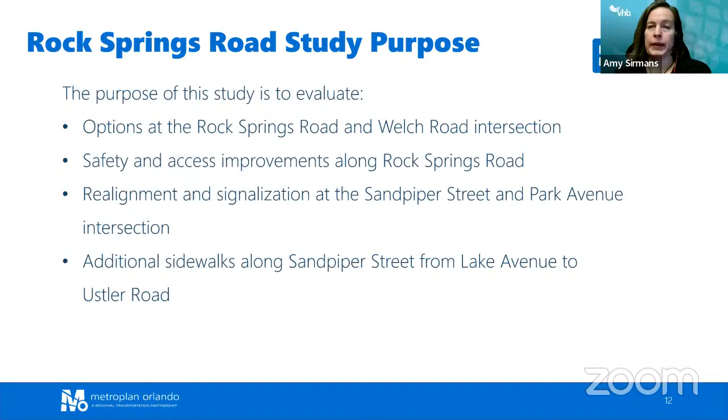The following options are considerations to improve operations and safety as part of the Rock Springs Road study: additional turn lanes and traffic control separators at the intersection of Welch Road and Rock Springs Road, and a new signal at the Publix North entrance near the McDonald's and Bubbalou's restaurants.

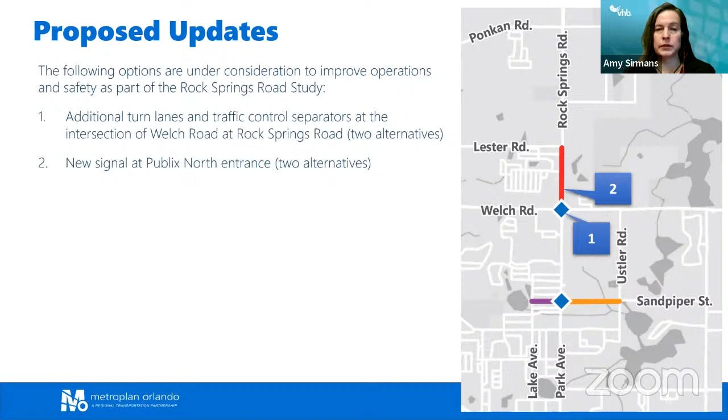A new mid-block crossing south of Tanglewood Drive. Minor intersection improvements at the Lester Road and Rock Springs Road intersection.

Realignment and new signal at the Sandpiper Street and Park Avenue intersection. New sidewalk along the north side of Sandpiper Street from Lake Avenue to Park Avenue, and new sidewalk along the south side of Sandpiper Street from Park Avenue to Ustler Road.

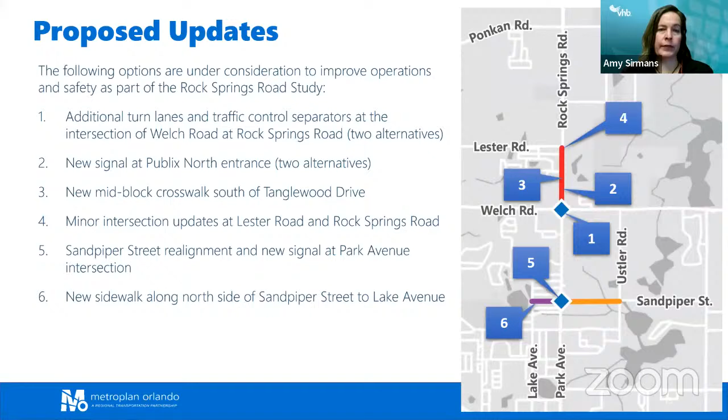We looked at 2 alternatives for Rock Springs Road. For alternative 1, I also want to point out that we understand the importance of these improvements - there was a fatal accident on the corridor today, so that brings out even further the importance of looking at this intersection.

For alternative 1, the east leg of the intersection features a single left turn lane, 2 through lanes, dual right turn lanes, and a raised traffic separator. The west leg of the intersection consists of single left and right turn lanes, 2 through lanes, and a raised traffic separator.

The north leg of the intersection consists of dual left turn lanes, a dedicated right turn lane, and a traffic separator to restrict left turns in and out of the Publix South entrance. Lastly, the south leg of the intersection proposes a single left turn lane, a dedicated right turn lane, 2 through lanes, and a raised traffic separator.

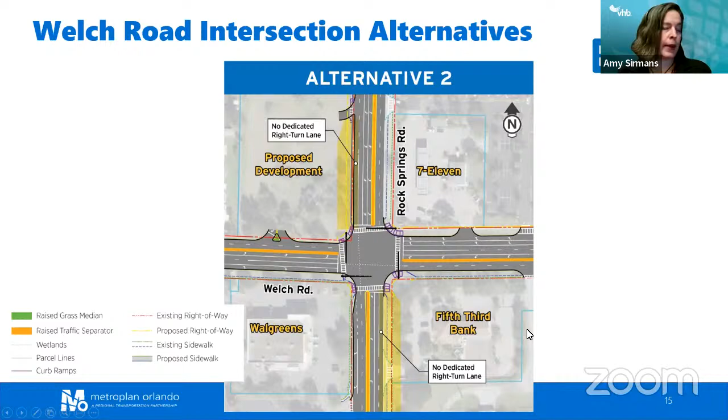Alternative 2 provides a similar lane geometry to alternative 1, but alternative 2 does not provide the northbound and southbound dedicated right turn lanes.

This study proposes adding a signal to the intersection at the Publix North entrance and Rock Springs Road. The study team has come up with 2 alternatives for this intersection.

In alternative 1, the south leg of the intersection features a dedicated northbound right turn lane and 2 through lanes. The north leg of the intersection features a southbound left turn lane and 2 through lanes, along with a raised traffic separator. The east leg of the intersection features a left turn lane and a right turn lane out of the Publix North entrance.

Alternative 2 provides a similar lane geometry to alternative 1, but alternative 2 does not provide the dedicated northbound right turn lane.

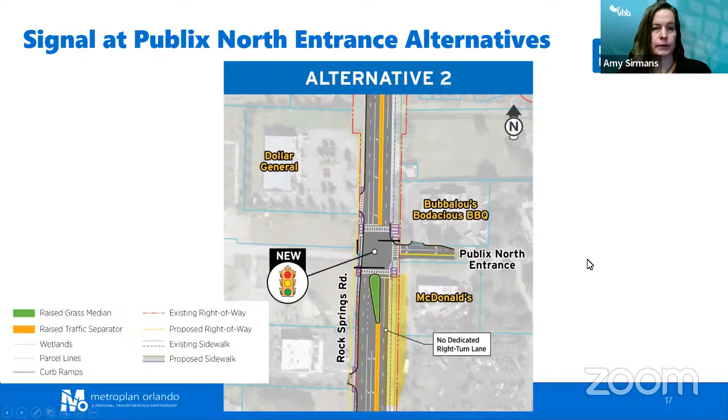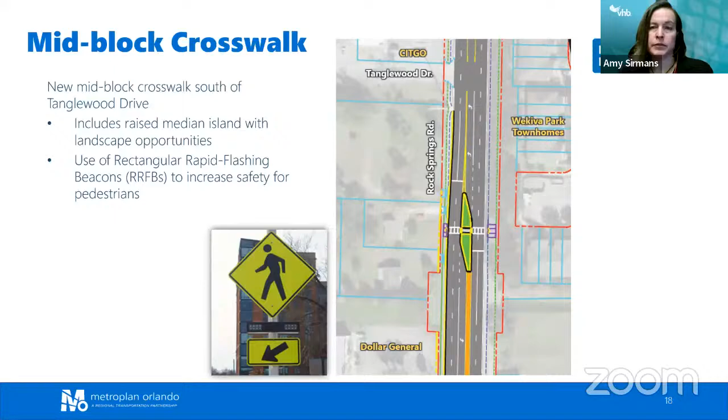A new mid-block crossing is proposed south of Tanglewood Drive. The mid-block crosswalk includes a raised median island with opportunities for landscape. Rectangular rapid flashing beacons, also known as RRFBs, would be installed along with the crosswalk to increase safety for pedestrians.

Moving down to Sandpiper Street at Park Avenue, proposed updates include the realignment of the east leg of Sandpiper Street and a signalized intersection at Sandpiper Street and Park Avenue. The study is also evaluating the construction of new sidewalk along Sandpiper Street.

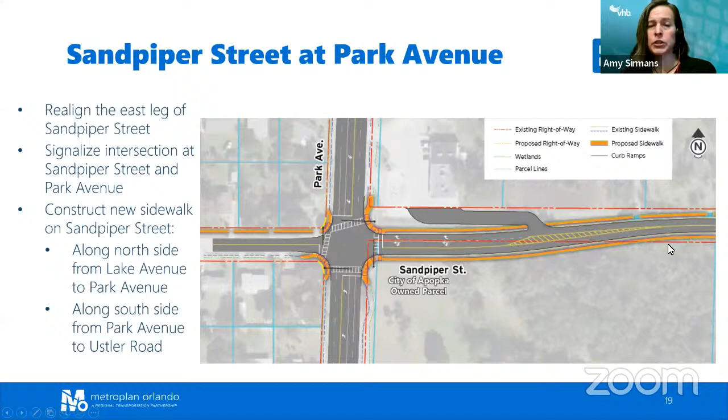Again, the new sidewalk would be provided on the sides of the street that don't have existing sidewalk - specifically along the north side of Sandpiper Street west of Park Avenue to Lake Avenue, and along the south side of Sandpiper Street east of Park Avenue to Ustler Road. This would increase sidewalk connectivity to the existing West Orange Trail.

Potential impacts associated with Rock Springs Road at Welch Road intersection alternatives include the need for right-of-way acquisition and impacts to existing utilities. Alternative 1 and Alternative 2 will have similar utility impacts. However, Alternative 2 requires less right-of-way than Alternative 1.

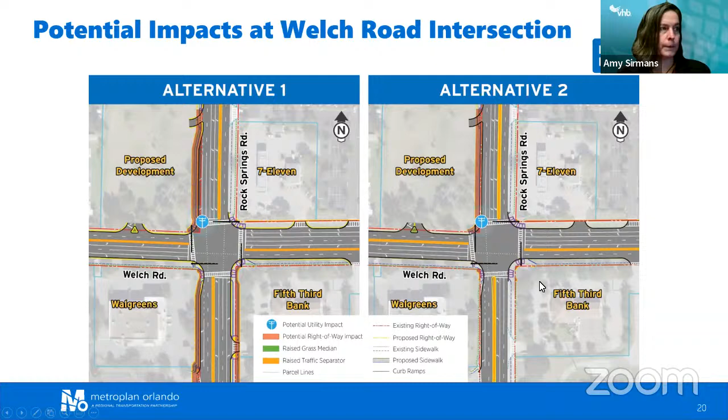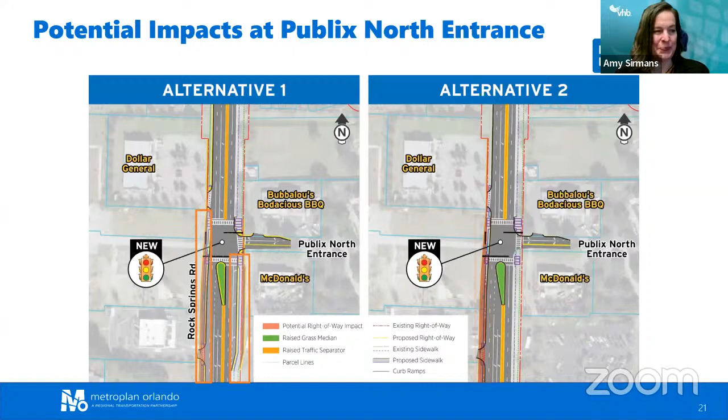Oops, sorry about that. Too far.

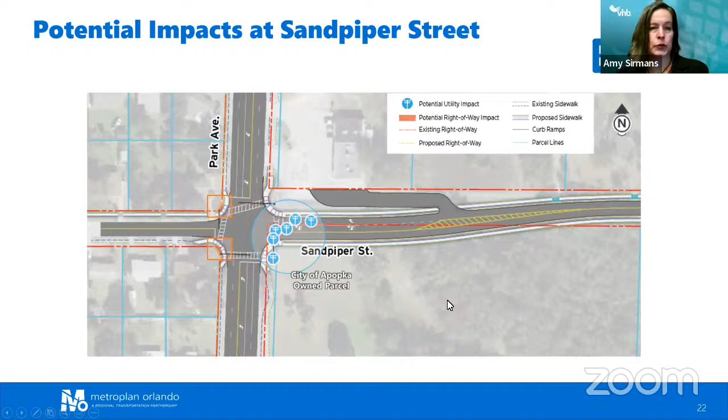We will now review the Rock Springs Road traffic analysis results. Using an evaluation measure called level of service, also referred to as LOS, we are able to relate the quality of service for a mode of travel.

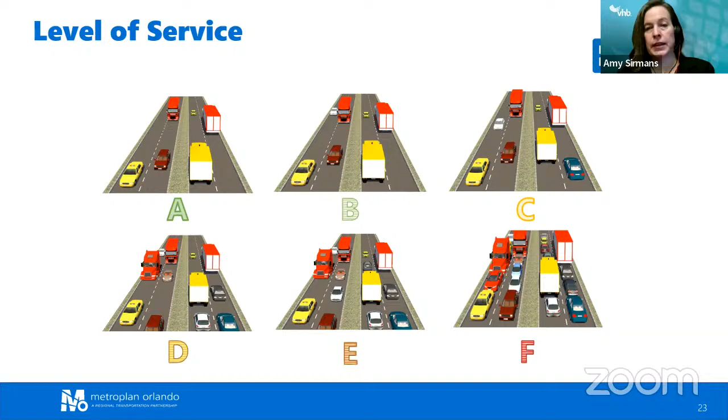These figures illustrate the traffic served under conditions ranging from level of service A to level of service F. Similar to grades in school, a roadway that performs at level of service A is not congested and supports free-flowing traffic. A roadway that receives a failing grade experiences heavy congestion and has significant delays, as depicted in the level of service F exhibit.

Existing traffic data was collected and analyzed along the study corridor. The target level of service assigned for the study corridor is LOS-E.

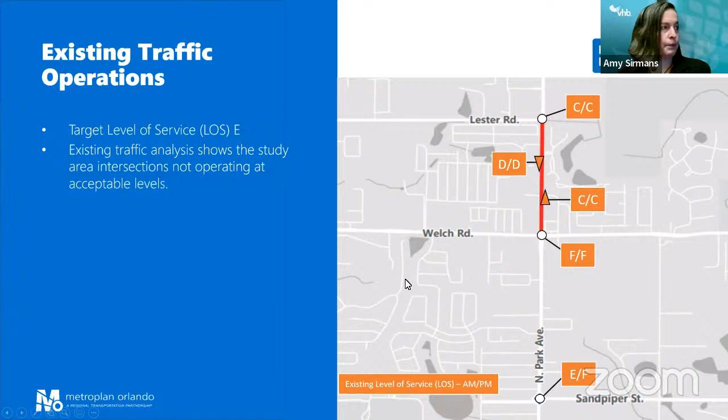Utilizing future growth projections and traffic models, a long-term growth factor was applied to project the traffic volumes within the study area to a future year of 2045.

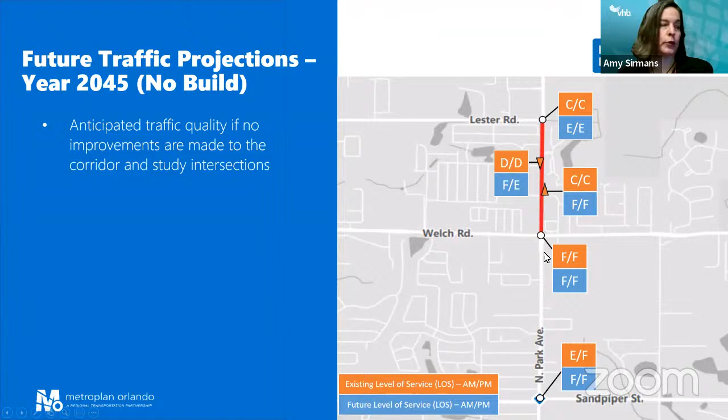While the intersection at Rock Springs Road and Welch Road is projected to operate at the same level of service as existing, it is expected to experience much higher delays in the future year 2045 with no improvements.

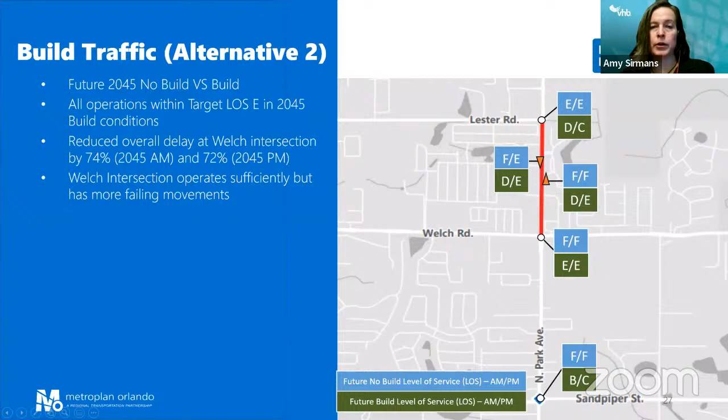Similar to Alternative 1, Alternative 2 build conditions result in all operations within the target level of service. There is a reduced overall delay at the Welch Road intersection by 74% in the AM and by 72% in the PM. In Alternative 2, the Welch Road intersection operates sufficiently but has more failing movements.

Both alternatives are expected to reduce the overall delay at the intersection, with Alternative 1 providing slightly better improvements over Alternative 2.

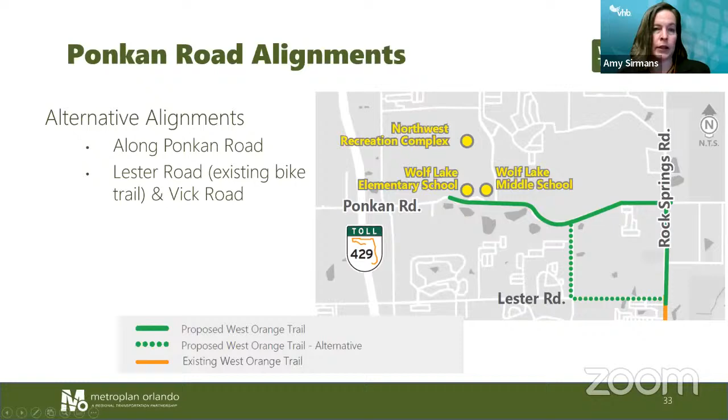Ponkan Road alignments run along Ponkan Road again to connect to the elementary and middle schools, as well as the recreation complex. Here you can see the alternative alignment that utilizes the existing bike trail on Lester Road and Vick Road.

Along Rock Springs Road from Lester Road to Kelly Park, the study is looking to keep the proposed trail alignment along the east side of Rock Springs Road to tie into the proposed Wekiva Trail. An alternative alignment is also being proposed to utilize the Wekiwa Springs State Park boundary where possible.

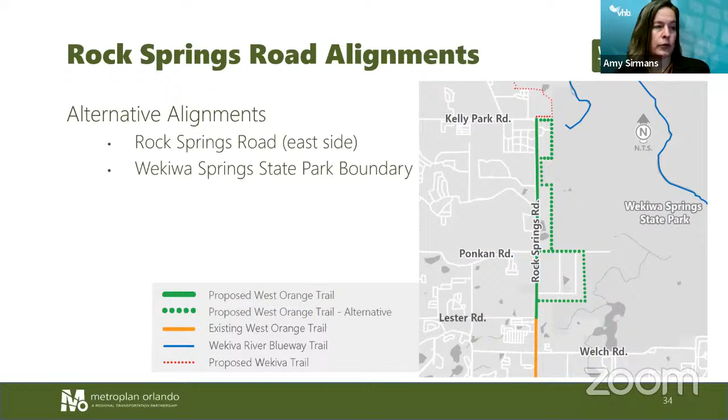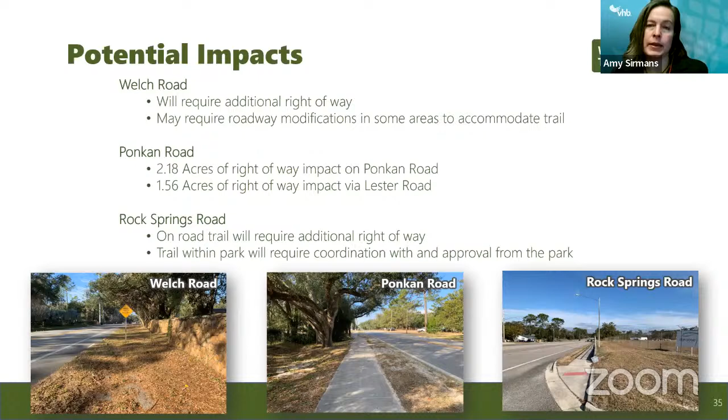The proposed alignments to the West Orange Trail are associated with potential impacts to the right-of-way. The Welch Road spur will require additional right-of-way and may require roadway modifications in some areas to accommodate the trail. On the Ponkan Road spur, 2.18 acres of right-of-way are impacted, and 1.56 acres are impacted on Lester Road. The Rock Springs Road on-road trail will require additional right-of-way, and the trail within the park will require coordination with and approval from the park.

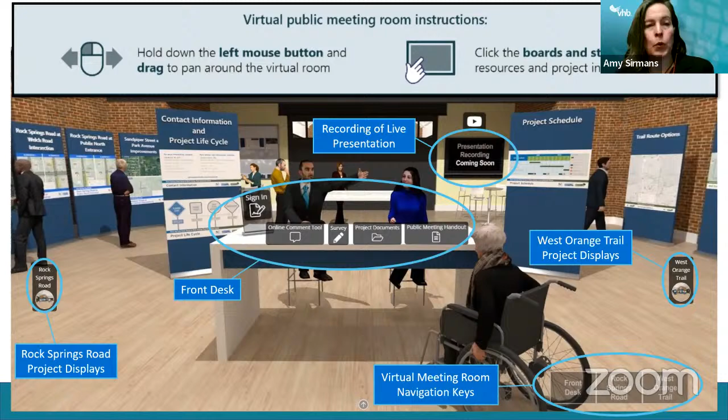If you're not able to visit the virtual meeting room, there are several other ways you can get involved and provide feedback on this study. You can enter your comments in the Zoom Q&A box during this live presentation. You can mail your comments to the project manager, Laura Bouck, at 250 South Orange Avenue, Suite 200, Orlando, Florida, 32801, or email to lbouck@metroplanorlando.org. You can also submit your comments and fill out the online survey directly through the project website at metroplanorlando.org/rocksprings.

We will now begin the question and answer portion of the meeting. If you have not already, please enter your comments into the Q&A box located on the Zoom control panel. You may also mail or email your questions following the meeting, again to lbouck, B-O-U-C-K, @metroplanorlando.org. We will answer as many questions live this evening as time permits.